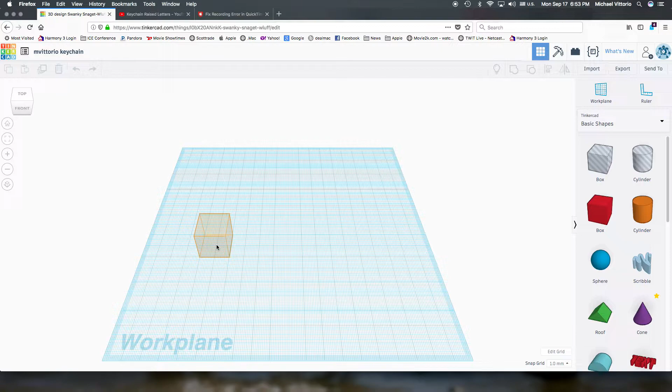The next step, you're going to click on the box where we're going to make the base of the keychain. You're going to put it on a square, a line where a couple go together. It's not really important if it's somewhere in the center here. Then click on this box - we already want the depth at 20, so that one is already correct. The other one, I'm going to click in the box and type in 85, so this keychain is going to be 85 long, and I want it only 6 tall. So I click on the box at the top here, type in 6, and hit return.

So the box is finished. Once you get this done, pause this video and complete this much.

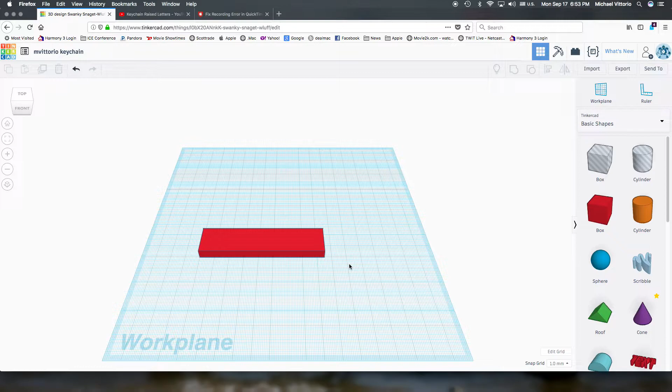The next step is putting the cylinder or hole in the keychain so the chain can pass through it. So I select the whole cylinder and bring it over, and then I'm going to click the corner and change this cylinder, or the hole, to be 12, hit return, and then I'm going to put this onto the keychain.

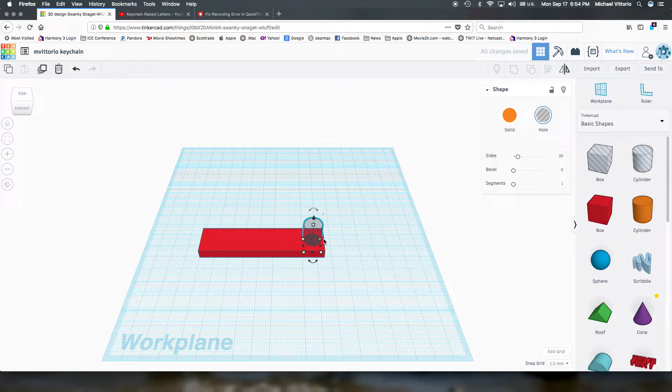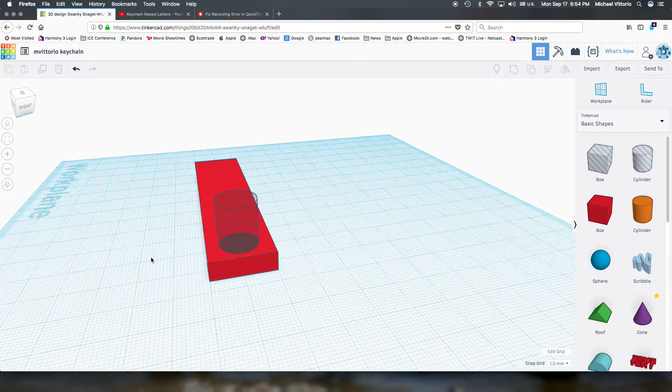Now I want to make sure that's kind of centered here, so it should be like 6 millimeters or so it lines up. So I'm zooming in. I'm also going to right click on a mouse, or you can click up here to change it to the right side so it does it quickly, and you can look to see if it's kind of centered up so it's the same on both sides. I got it pretty close, might not be exact. You also want a good 2 or 3 millimeters here from the edge for the plastic, so that when this builds up, it won't be weak here, that the keychain would pull out through the center of there, right?

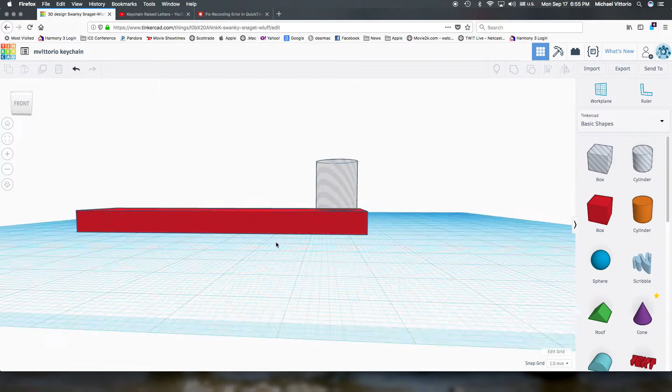The next step, with the side angle, I click on the cylinder, left click, and I'm going to use the arrow now at the top and pull it down to go through the block so I can see it below. I'm just making sure we have a complete hole.

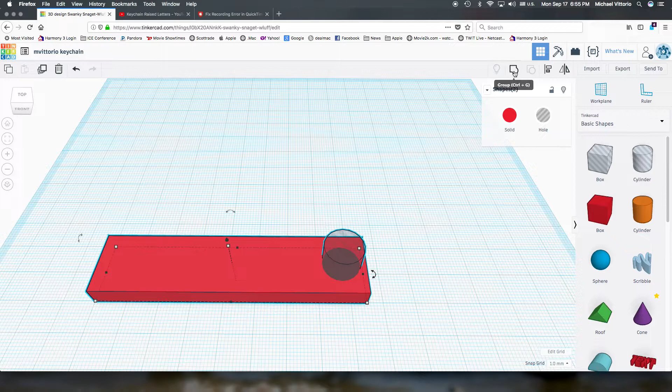Now if I right click and rotate up, I'm going to left click over in the corner and select all of what I've designed so far, and then I'll click group right there. So when you hit group, you put the hole in there. Please pause and complete that amount.

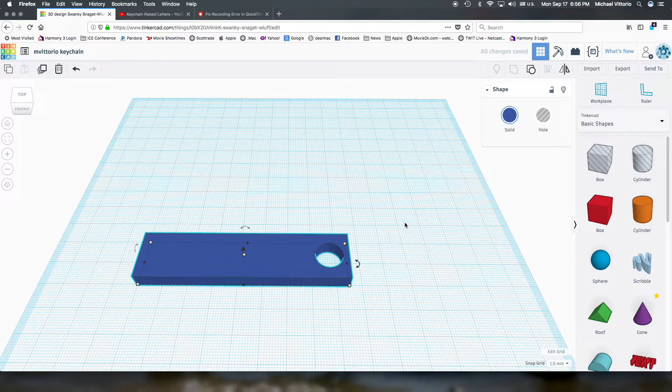The next item, we're going to put text onto the screen. It doesn't matter what color, like if I change the color of this thing to blue, it won't matter. It will print in whatever color is in the printer.

So the next thing, I'm going to hit text and put text down here, and that text, you're going to type here whatever you want to put that's school appropriate. Like oftentimes people put their last name in order to put it on their computer bag so somebody else doesn't take their computer bag by accident, or people put their favorite sport or something they're interested in, but doing a tag for your computer bag is a pretty good use of the keychain.

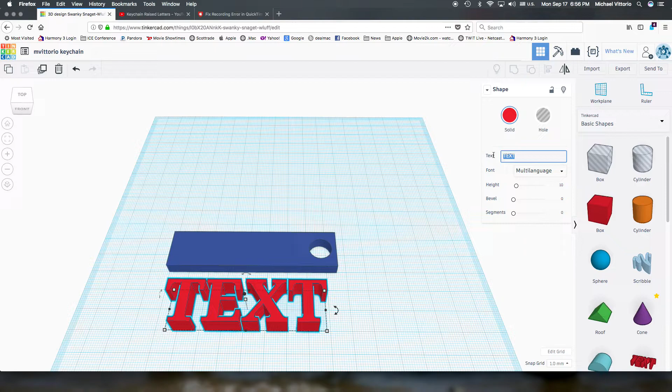So whatever you want to do, I'm going to type in Tipton just for this example. And you can do all caps, or you can do upper and lower case. And you notice it's much bigger than my keychain.

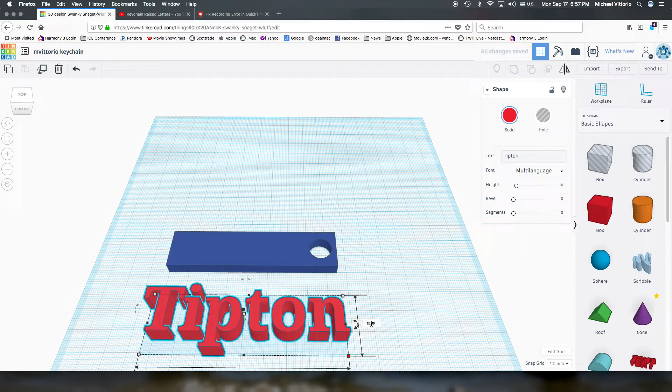So the way to make sure this is accurate, that it fits here, remember this depth of this thing is 20. So if I click the corner, I can type this down. I don't want it right on it, I want to put it underneath it. So I'm going to type this at 18 for depth and hit return. And then, whoops, I was wrong. Yeah, that's right, 18, sorry, wasn't thinking quite right on that. So that's 18 for the depth.

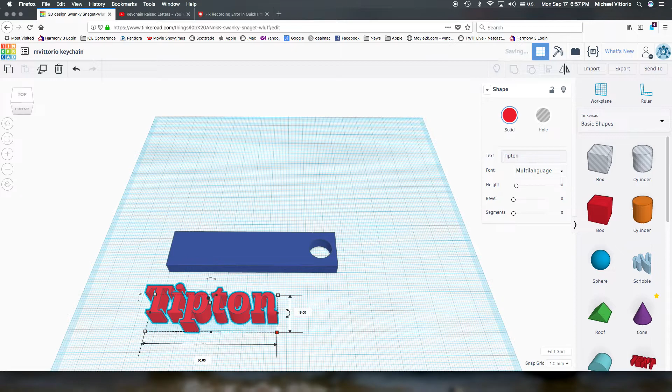And then at the bottom, the whole thing's 85, but we have the circle there, so you want to change that down to 60 and hit return. If you look at the side view, this is way too tall, so we want to click here and reduce this down to 8 so we have just 2 millimeters sitting above the surface.

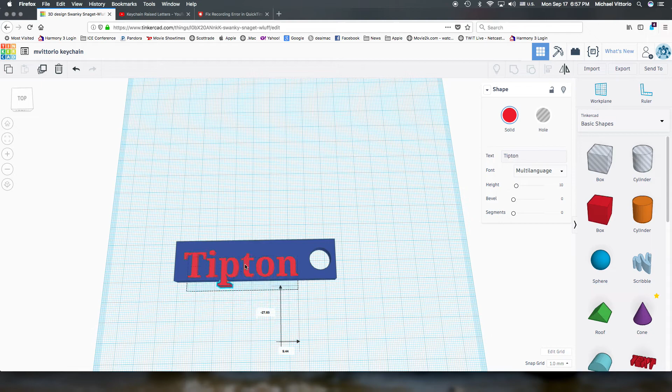So if I right click and pull this up, I'm going to move this onto here. But I want to leave 1 millimeter, that's this right here. So underneath I want 1 millimeter here and 1 millimeter at the top, so it's even between the two.

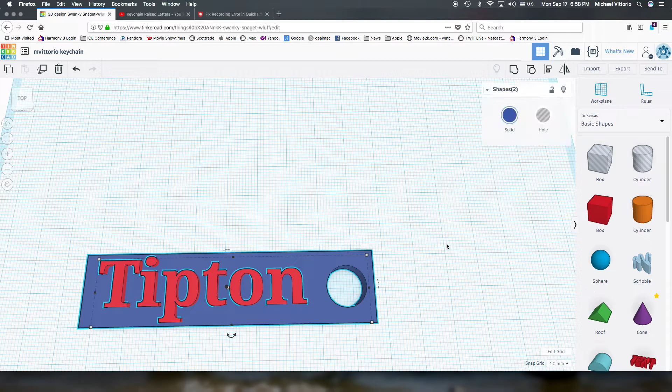Once you got it positioned where you kind of like it, you can put a box around it all, and you're going to hit group.

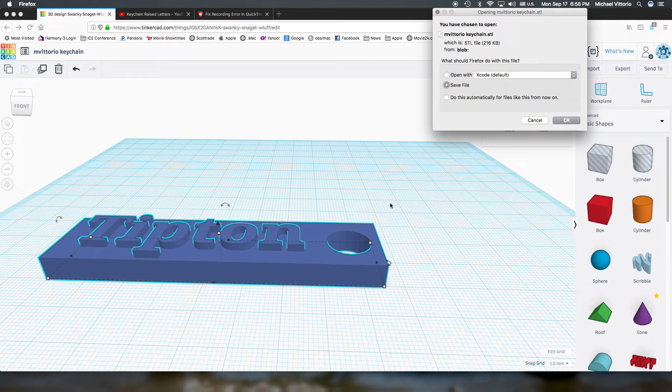I will check it, and then I'll have you export it as an STL file. I'll just show you this part. So you end up exporting it, you'll hit STL, and then you'll save that file. And when you find that file, it's going to download it. And when you find the download, that STL file will have that name, I'll say STL. That's what you'll upload to Google Classroom, and then I'll be able to print it.

That's the end of this tutorial.